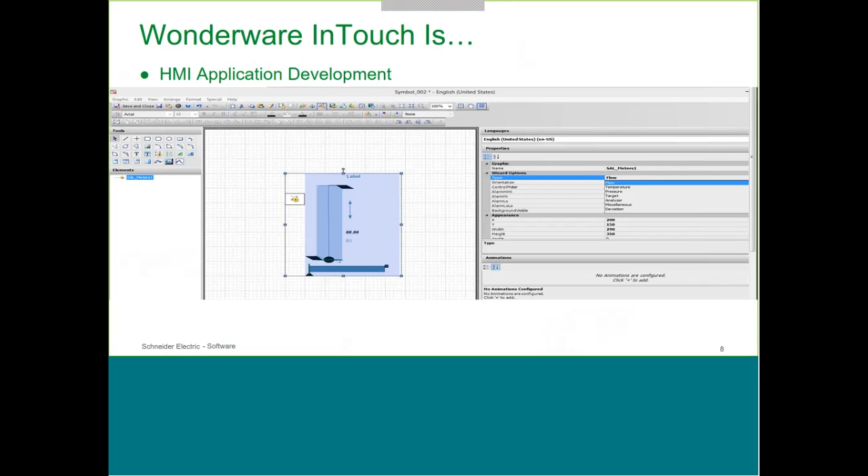So a little bit of background on what Wonderware InTouch is. It provides application development for HMIs. It provides real-time process and discrete data visualization and control. And it provides trends and alarms and history. And it's much more than an HMI.

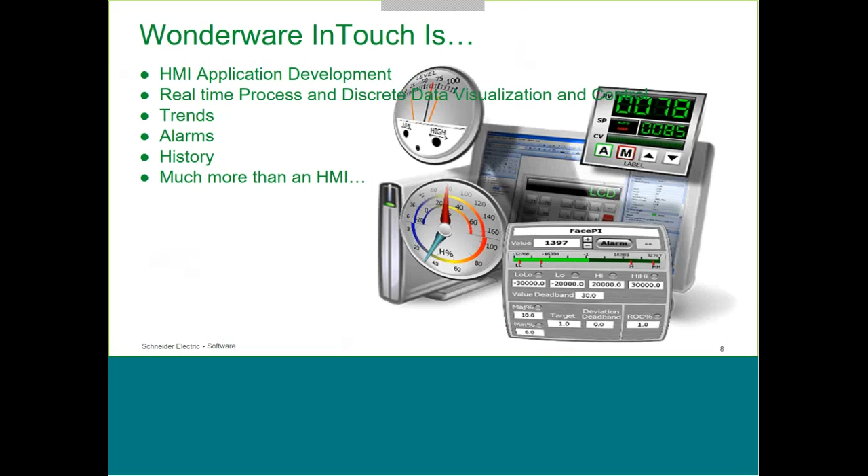You can access InTouch via any browser, which means any device. So using the native browser of your Apple device on Safari, or on your Android device using Chrome, or on your Windows device using Microsoft Edge or Internet Explorer or Firefox. So any of those browsers allow you to access your full InTouch application. And we'll show you how ArchestrA Graphics really help that capability to resize your InTouch windows and graphics based on the screen you're trying to show your application on.

So why use ArchestrA Graphics? Well, for one, there's 3 graphics libraries that are included to help you get started building your HMIs very quickly. That includes the ArchestrA Symbol Library, the Situational Awareness Graphics Library, and the Water and Wastewater Industry Graphics Library. Those are all included for free with current versions of InTouch.

Symbol Editor is now right inside of Window Maker. Symbol Editor is where you can create, edit, and manage ArchestrA Graphics, and it's the most advanced graphical editor for SCADA available. They are vector-based graphics, which means they scale really well across different resolutions and screen sizes. By using ArchestrA Graphics, your screens and your symbols will be InTouch Access Anywhere ready for any browser to run the application.

They allow you to create standards, enforce standards, and protect your standards. They provide reusability and change propagation capability. That's good for reusing engineering time, reducing development time, and they also include more animation capability, including alarm borders. We'll take a look at those.

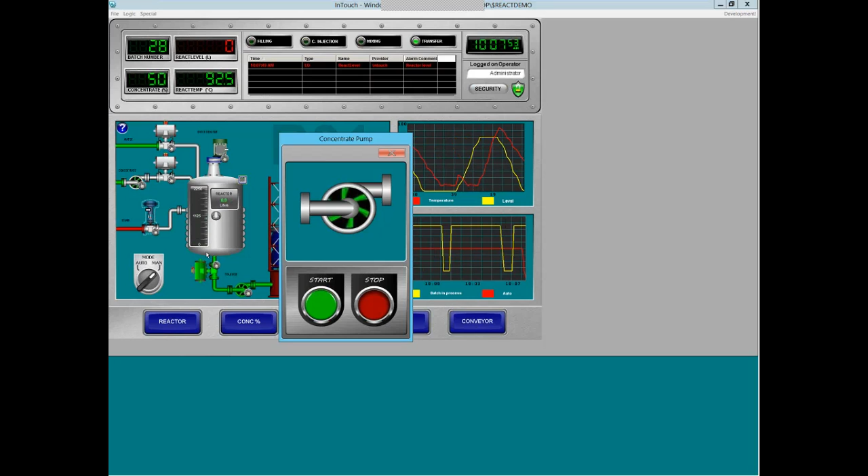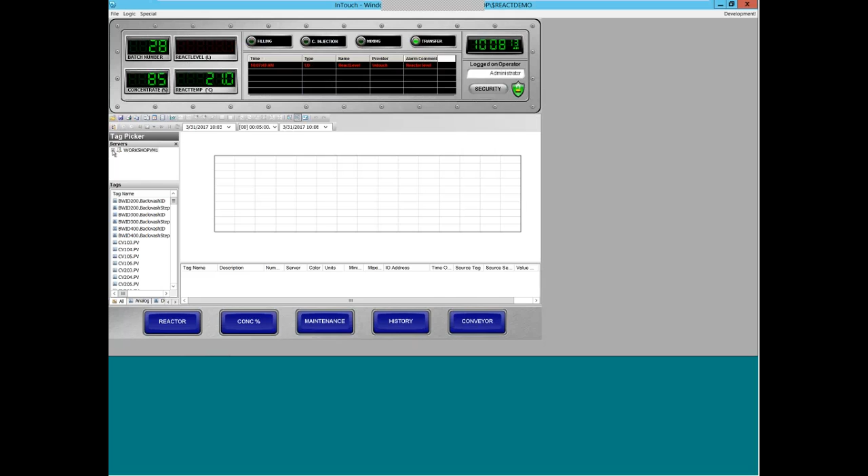You can see the high quality of these graphics here. And I can show you some pop-ups here, some other faceplates. I can change some set points and view some historical trending. This, of course, is using our Wonderware Historian Client Trend tool to do trending. There's native trending built into InTouch as well.

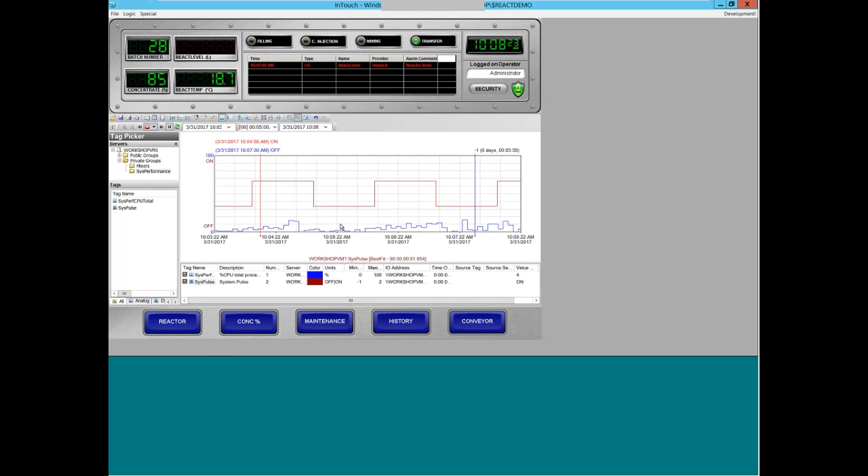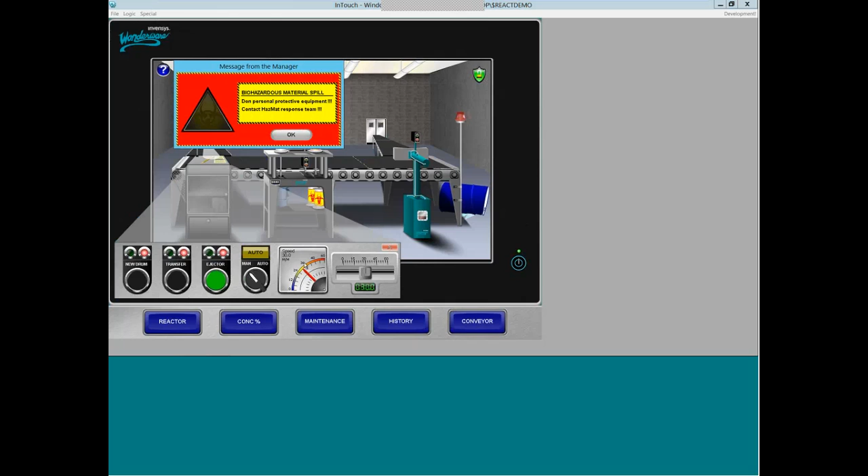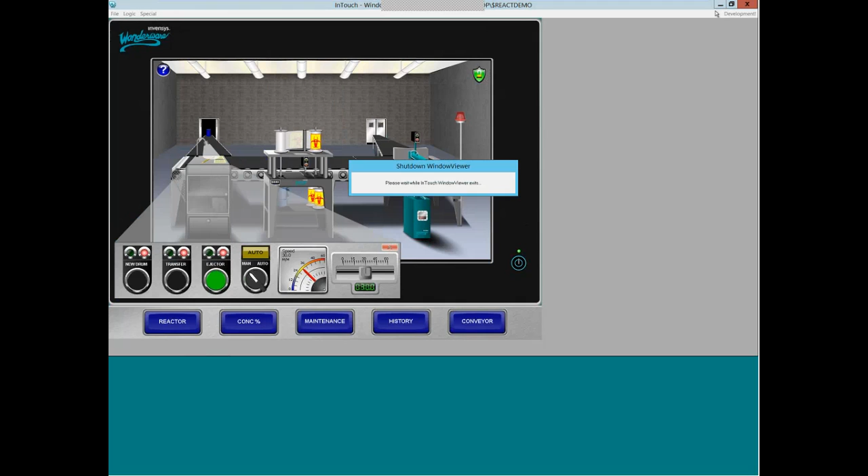And here's just another example of some really cool graphics inside of ArchestrA symbols. I'll put that in manual and kick the drum off the conveyor, and you can see the animation capability you can do here. Okay, so that's the Reactor demo. That's included as part of the Wonderware install. You can always open up that application to see how it was built.

I'm going to show you another application here, what's called the InTouch Modern application. This is also included in the current install of 2014 R2 Service Pack 1, where you can import this application from. So we'll click on File and go to the C drive, and it's in Program Files x86, in the Wonderware folder, in the InTouch folder, in the Demo app. And there it is, the InTouch Introductory Demo, AAPKG.

That AAPKG file is what you use when you import and export a modern application, which is what we're going to be working with using ArchestrA Graphics inside of Window Maker. You export this file called an AAPKG. Importing and exporting an application uses this new file. If you've never worked with a modern InTouch application or System Platform before, this is what the file is called when you export and import your application.

Right inside of that same folder is also a PDF called Using the InTouch Demo Application. So you can learn a little bit about importing and exporting that AAPKG file, with just a couple pages on how to get started using this. So let's take a look at the application here. We'll just go ahead and jump into Window Viewer.

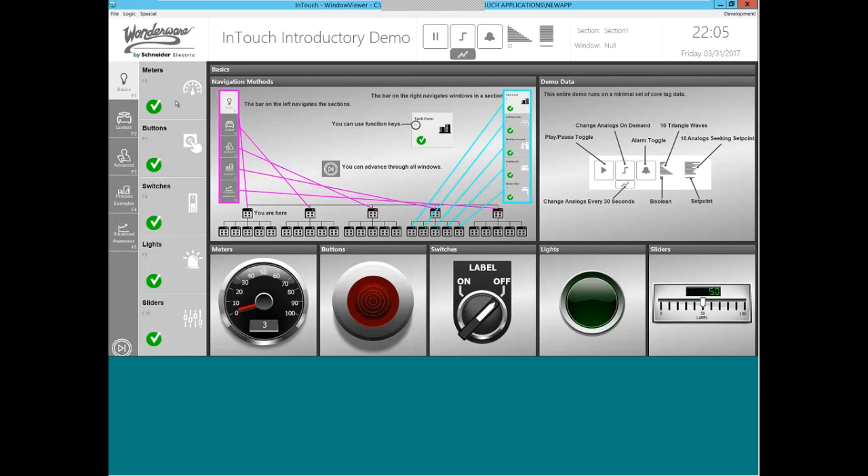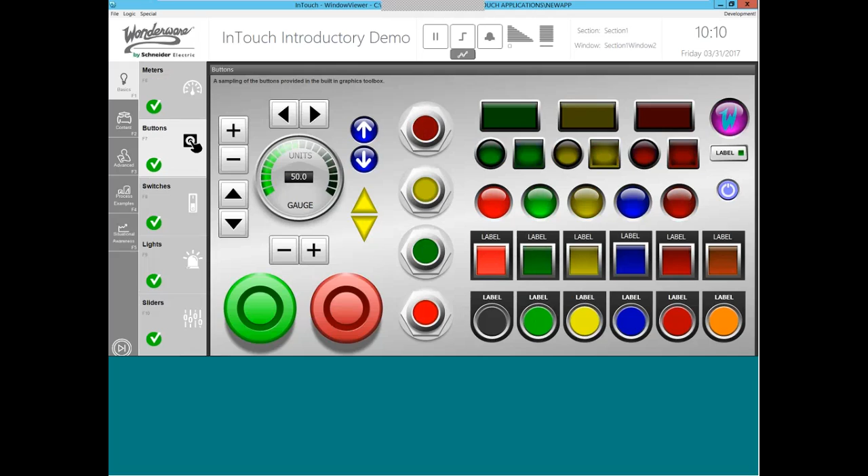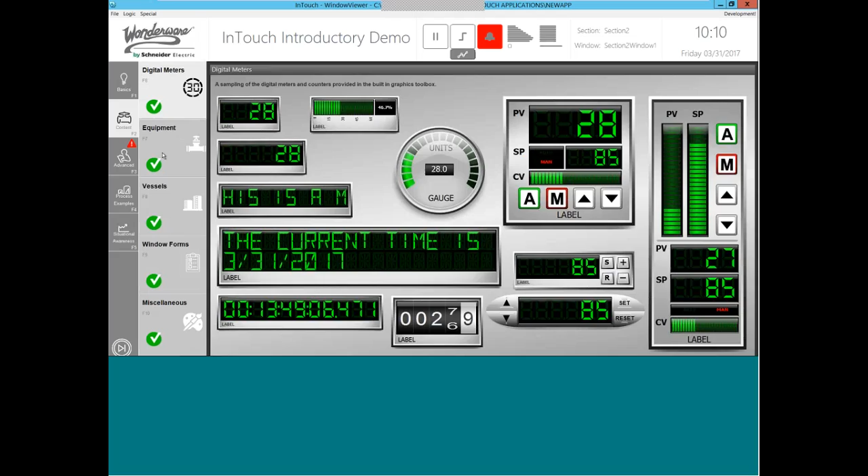Okay, so I've got a demo application here that again is included with the install. It just shows you some of the example graphics here. Those are some meters, some push buttons, switches. I'm just going to go through these quickly. Lights and sliders and meters. These are all included in the ArchestrA Graphics library.

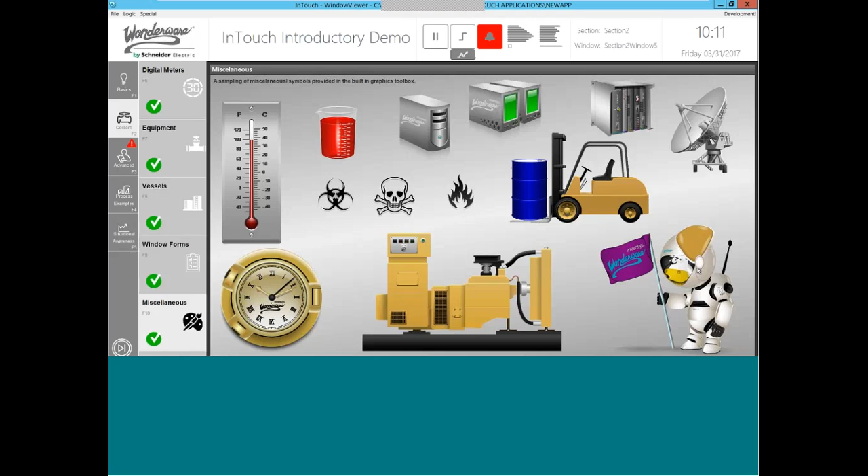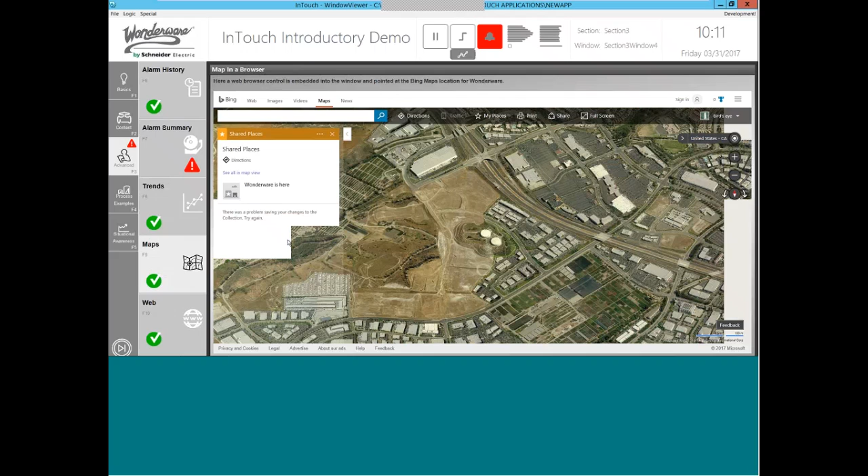Equipment, tanks, Window Forms, of course our Wonderware cow, our space cow, alarm history. Again, this is all part of InTouch. Alarm summary. I already showed trends. Mapping capabilities. This is just a browser embedded inside of InTouch. Here's another browser embedded inside of InTouch with our website.

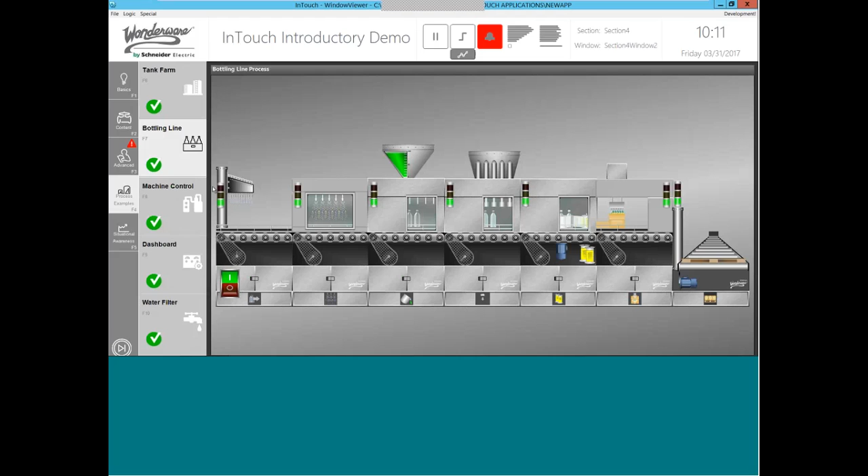This is a tank farm. Remember this one? We're going to edit this one here in development. Here's an example bottling line. And machine control, I'll go ahead and start up my car here and rev it up and see the details of temperature and PSI and look at some trends, some real-time trends here, look at some statistics.

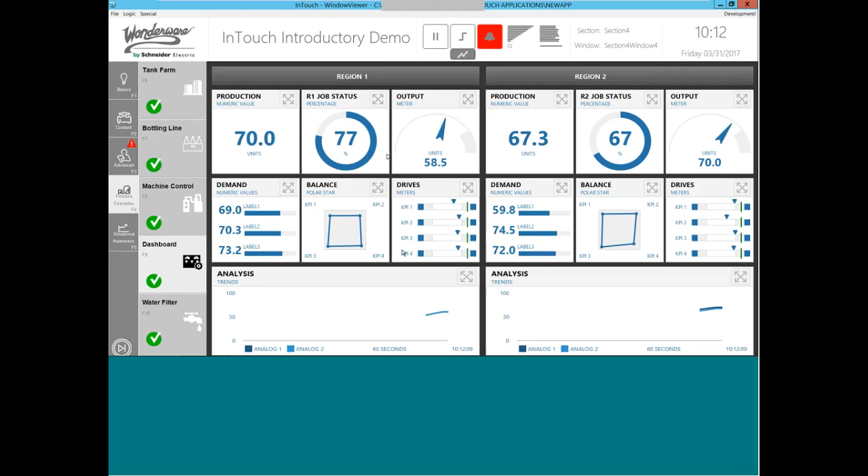And then I've got a dashboard here looking at a couple different regions. These are all, again, from our situational awareness library. Here's my more traditional HMI, looking at a gravity filter here.

Situational awareness. So if folks are new to situational awareness, in the past we used to build single value, real-time value displays, and what situational awareness graphics help you do is build more context in for the operator so they can actually see not only what the real-time value is, but how does that compare to maybe my target region or my set point and my upper and lower control limits or alarm limits, and even adding now a trend pen to see what's been happening over time.

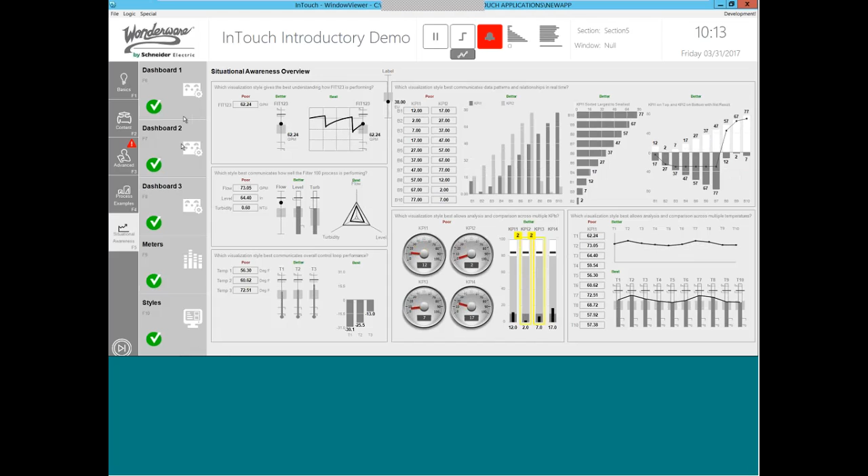And again, I'll show this in the development environment, how these bullet charts are configured to show an alarm border. So you can kind of see there's different regions here and then a set point. And so I'll show you how you get this alarm border here to show up.

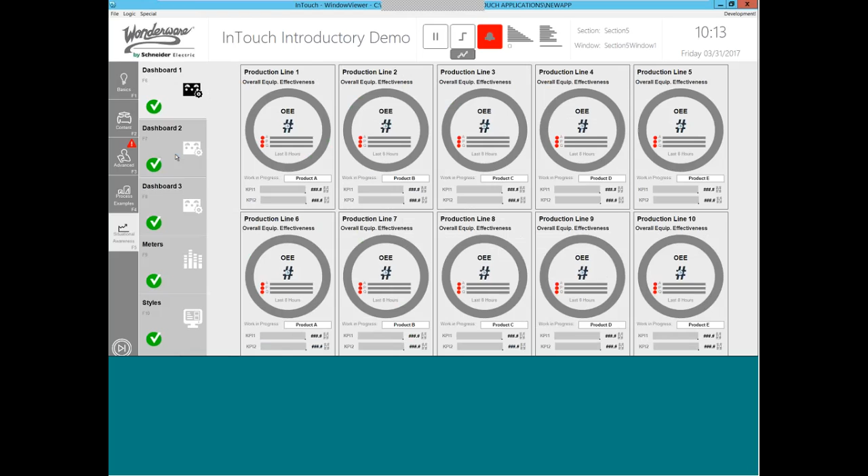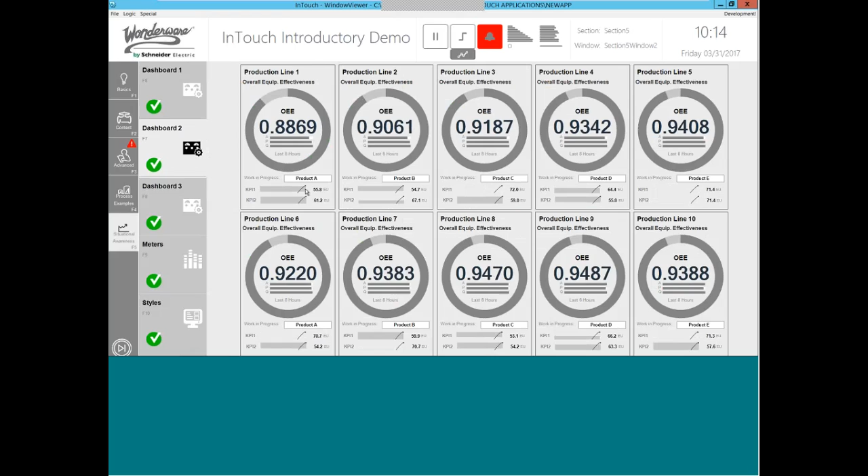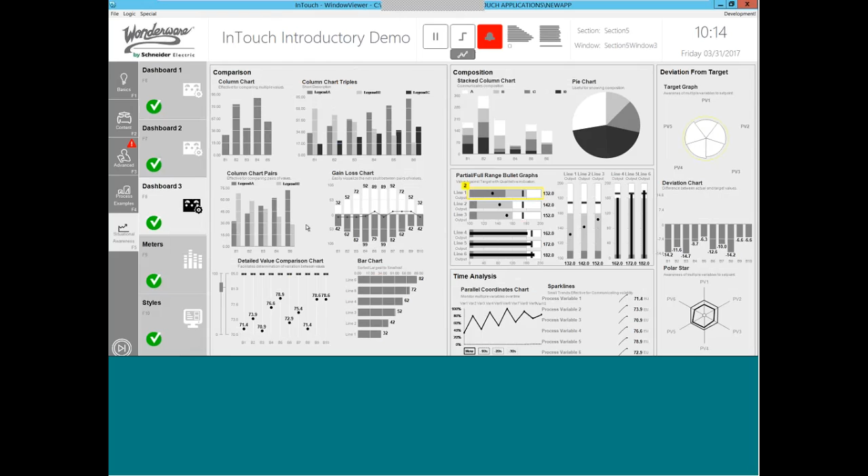Just another example, OEE dashboard. We're looking at a calculation on 10 different production lines here, looking at our overall equipment effectiveness, and we also, again, have these spark lines here, these real-time trends that are very lightweight. And some more dashboard graphics. These are all built in, again. Folks want to do more dashboards these days for supervisory overview of the status of their plants and the quality of their process.

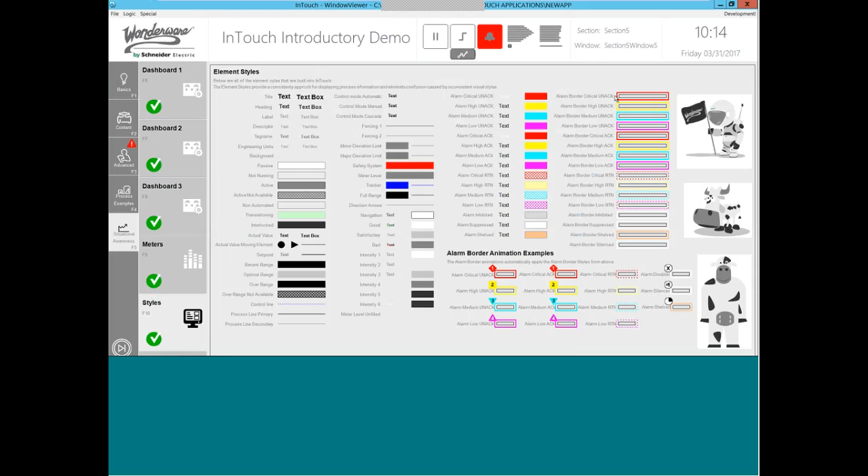Some meters, and I can go ahead and toggle the names of my meters here and the values. So I can toggle those on and off. And finally, styles. So again, we said you can create standards with ArchestrA Graphics and symbols. So create standardized colors. So what does an alarm look like when it's unacknowledged and it's a critical alarm versus what does a high alarm look like when it's been acknowledged? So you can create these standard colors and then enforce them throughout all the graphics and symbols in your application.

So how do I build a modern application? Well, back inside of InTouch Application Manager, which everybody who has used InTouch before is familiar with, I would create a new application if I was starting from scratch here, create new. And by default now, you get the application type to pick, and modern application is what gives you ArchestrA Graphics inside of Window Maker. If you say, hey, I don't want the option to see those ArchestrA Graphics inside of InTouch, you can always choose to create a legacy InTouch application. But of course, that's not what we're recommending here.

We're recommending modern applications. And if I've got an old existing classic application, maybe say it's version 9.5, how do I upgrade it to a modern application? Well, the same way I've always upgraded my applications. I simply open up my application in Window Maker in the newer version. So I've got 2014 R2 Service Pack 1 installed here, and I simply open it up in Window Maker. It'll ask me to migrate my application, and I would say yes. I've already done that, and I've changed the name now to this upgraded classic InTouch app.

You can see now it's a modern application, and I'm going to go into that one here in a little bit and show you how to convert existing InTouch windows, classic InTouch windows, into ArchestrA symbols. So for now, let's go ahead and open up that modern demo app in Development WindowMaker to show you what we've got here inside of the ArchestrA Graphic Toolbox.

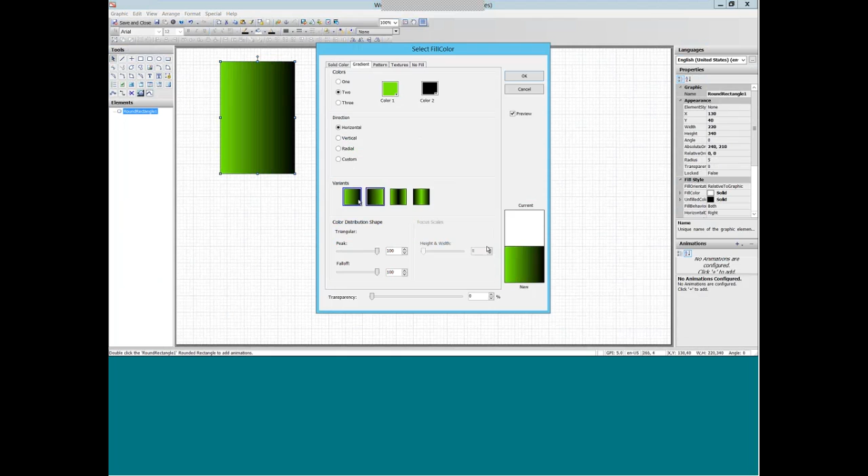And so what I can do if I want is I can use all these tools here to create my own graphics. I can create shapes here, and I could come here to my fill, and I can start creating my own custom graphic here with multiple gradients and variants, and I can see the preview of what those look like, and have transparency, and I can even flip it around if I want to. Okay, I see over here on the right-hand side, I can specify the XY location, the width, the height. I can add what are called custom properties, and we're going to do that here momentarily.

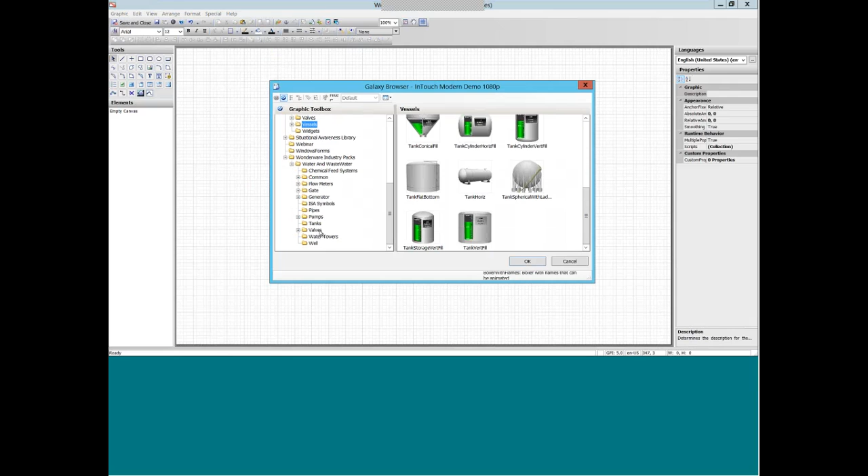So what we want to do first is just go browse our graphic libraries. Instead of building one from scratch, let's go grab our pump centrifugal, just to kind of show you some of the other ones here, right? Here's my tanks, and here's my water industry pack here with, again, those flow meters. Okay, so lots of good stuff here. Flow meter face plates. So I'm going to go ahead and go back to my pumps here, and I'm going to use this pump centrifugal.

Okay, so what I'm doing right now is I'm embedding a graphic that already exists, and that graphic is the same one that's here in my ArchestrA symbol library in my pumps folder called Pump Centrifugal. So what I'm going to do now, after I've embedded that, is I'm going to create a push button to turn that pump on and off. So I'll create a button over here.

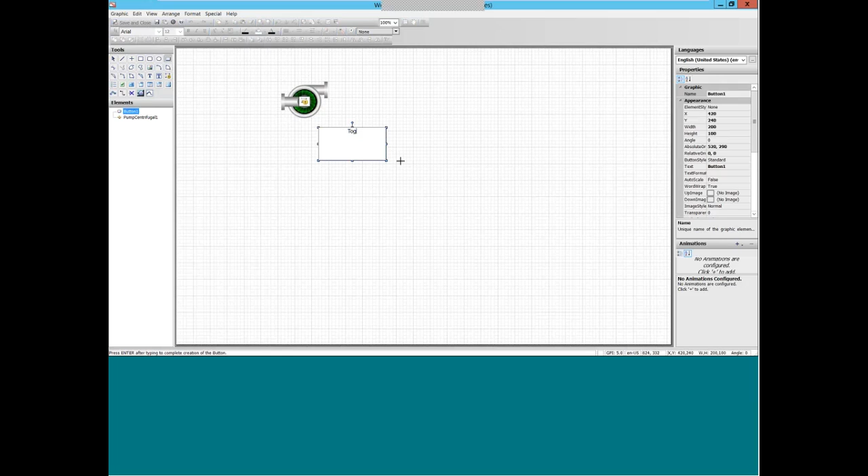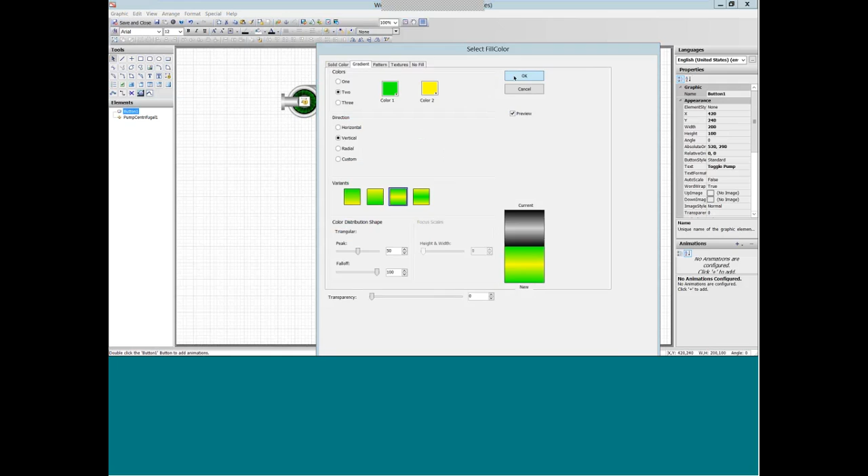I've got my button icon, and I'm going to just say this is the toggle pump, and I'm going to go ahead and again use one of those cool gradients up here from my fill color here, and I'll just maybe make it a little bit more colorful there. And so do that. Get a preview, see what that looks like, and maybe the second color, I'll make it more of a yellow. Okay, so I can quickly start to build some really professional looking graphics here and not have to spend a lot of time doing this.

All right, so now I want to go ahead and create a custom property here to toggle this pump with my push button. So I'm going to create a custom property, right-clicking on the canvas, click Add, and I'm going to call this custom property toggle pump. So I'll spell it right, toggle pump. Okay.

And so that's my custom property. And so what I'll do now is inside of this push button, I'm going to add an animation. So remember, here's all these cool animations that you didn't have with InTouch graphics before. So fill styles and visibilities and alarm borders and the location, the orientation, value display, user inputs, push buttons, action scripts, show symbol, hide symbol.

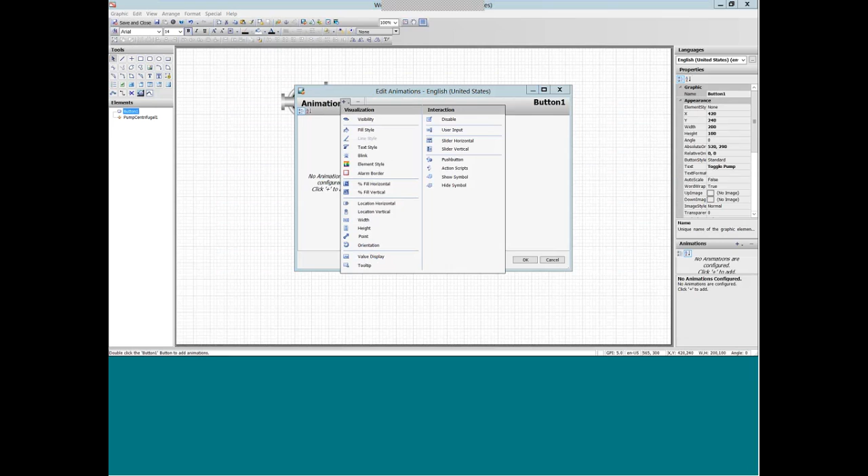So we're going to make this a push button. And it's a Boolean, and we're going to use our toggle pump. And look at that, IntelliSense finds our custom property there, toggle pump. And we're going to make it a toggle so we can actually get a preview of what that does. Sets our value, true and false.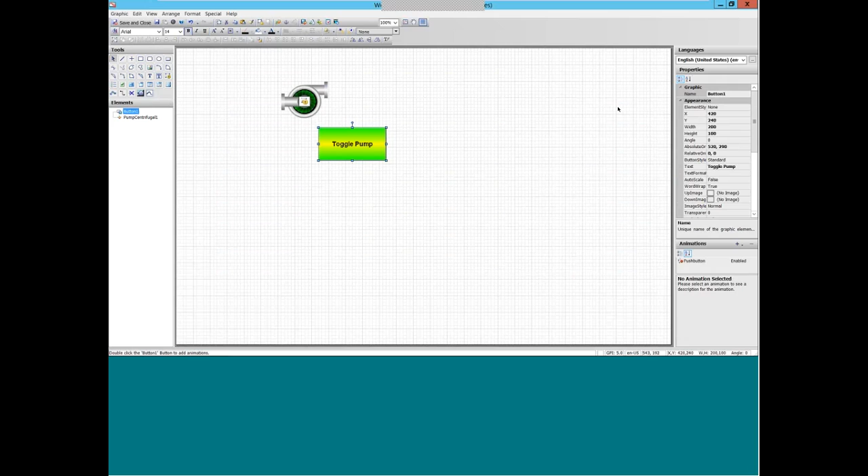Okay, so now we want to give our graphic a name here. So let's give our graphic a description here, and we're going to call this, again, our pump, call it W_pump. All right, so let's just give it a name. Okay. We'll go ahead and save and close this. Actually, you know what? We won't even close it. We'll just click Save.

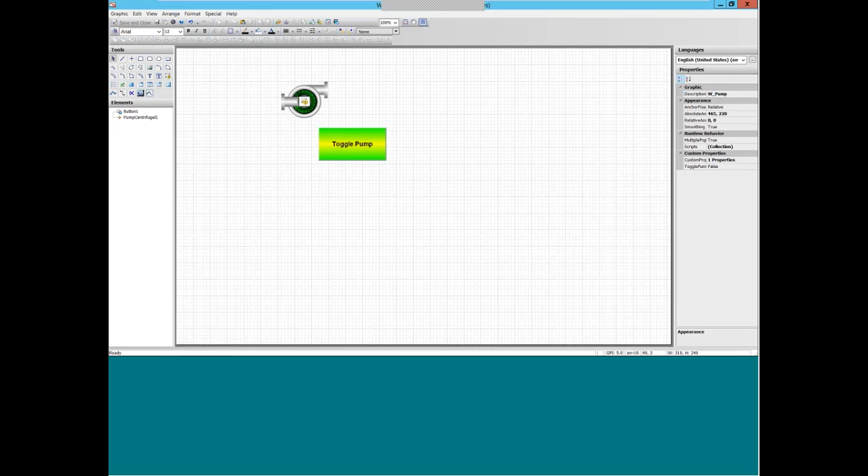And now we'll go back into WindowMaker, and we'll create a new window and call it New. And make it bigger. And now we've got our webinar pump here. I'll just simply drag it over here and double click on it. And there's my toggle pump custom property that I created.

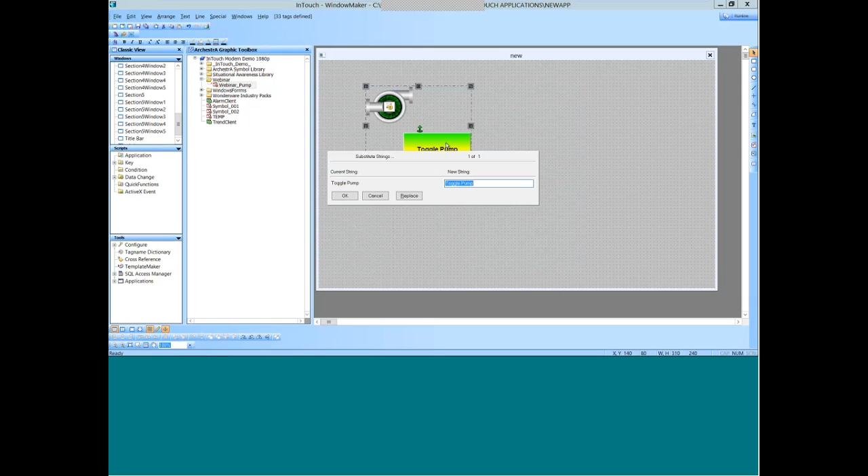And I'm going to go ahead and tie that to my InTouch tag now. So I'm going to go ahead and tie that to my pump 1. And the same thing with the animation for the pump. There's built-in animations, built-in custom properties for those ArchestrA graphics. We'll also use pump 1 for the 2 animations on that pump. There's an inlet animation and there's a pump animation. Okay, and then maybe I'll do Control L to substitute strings, and we'll say toggle pump 1.

All right, so let's just take a look at that real quick. Okay, so now I can turn my pump on and off. That looks good. Great. Okay, so what if I want to add a second one now? There we go. Add a second one. Open it up. I'm going to tie this one to my pump 2 tag. Double click. Go add it to pump 2.

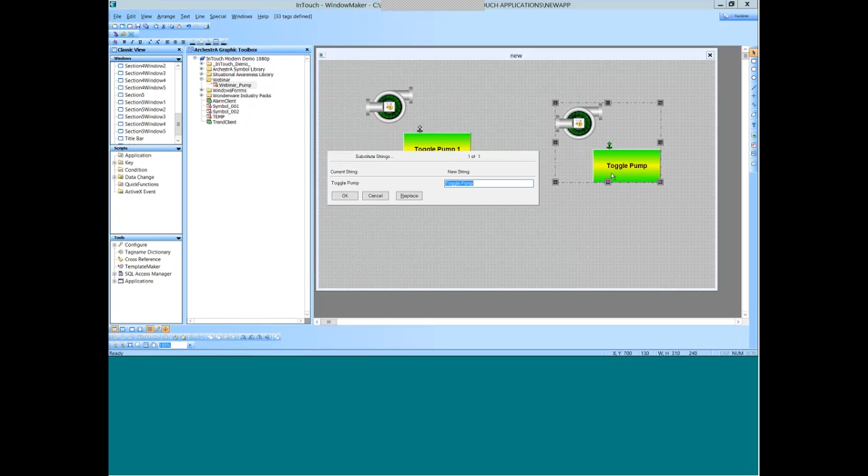And same thing here with my other animation for my pump. Just double click in this field, pump 2. And then for toggle pump, I'll also tie that to pump 2. Okay, and then we'll do a Control L to substitute strings, and we're going to say toggle pump 2. Click OK. All right, so you can see how fast we can start doing some really nice graphics here and creating that standard, right? We've got a standard.

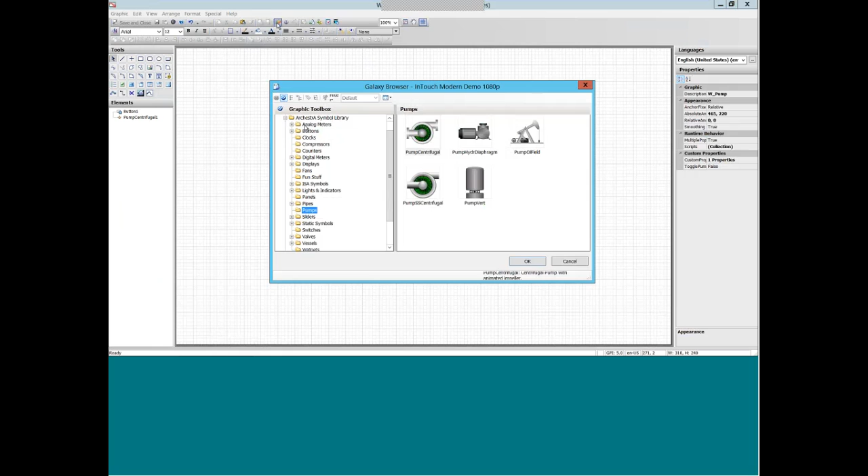So what happens now? I've got my pump here. Now, what if I want to go add a tank to that? Go here to my vessels, and we'll say we're going to add this tank cylinder vert fill just for simplicity's sake here. We're just going to do this quick. And again, I'll do a save and close this time.

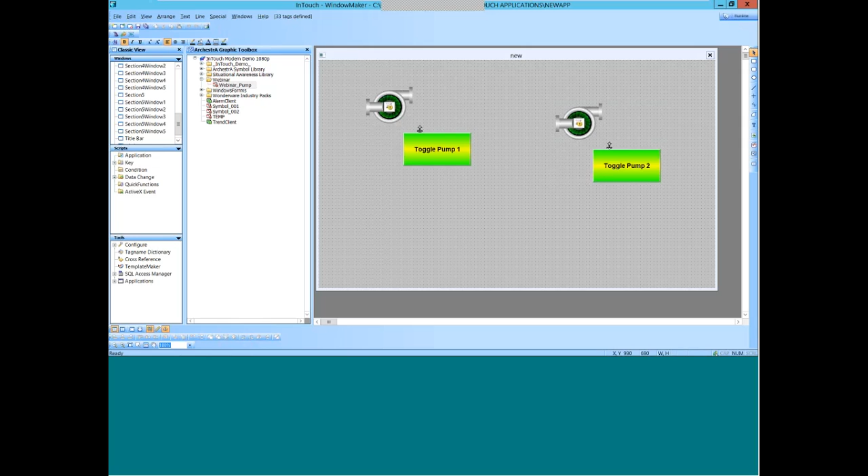And then there's a little button on the bottom here. It says one or more embedded symbols have new content. Double click to get the latest content. So that refreshes the screen. And now I've got the ability to go assign my tags to my tank. So I could go change the value here to my analog tag for my tank. Okay. So that's getting started there with ArchestrA symbols.

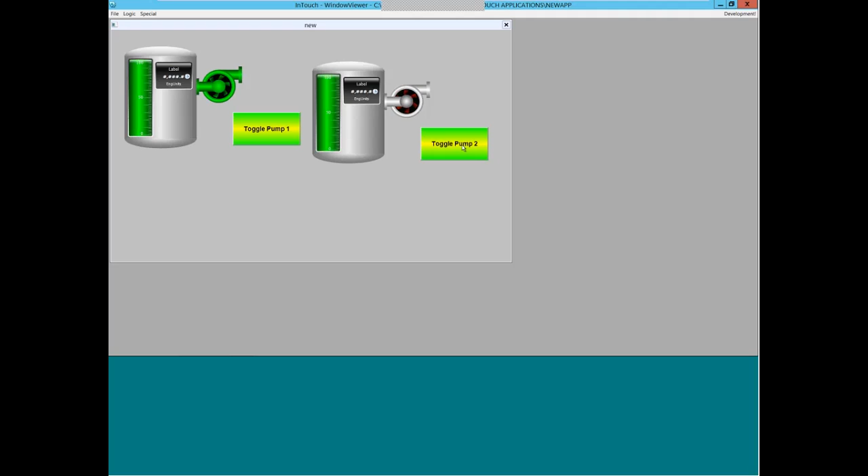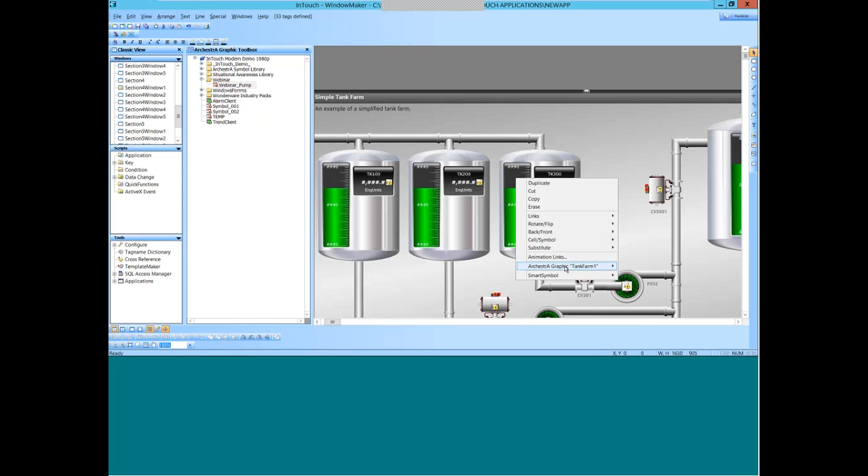Now let's go ahead and take a look at one of our existing screens we had here. We're going to go into Section 4, Window 1. Remember this screen here we showed you in the InTouch Modern app? So this whole screen is a single ArchestrA symbol. So when I right-click on it, I can go to ArchestrA Graphic Tank Farm, Edit Symbol. And here it is. So this is what we recommend, making your whole InTouch window an ArchestrA symbol. And I'll show you some benefits of how that helps.

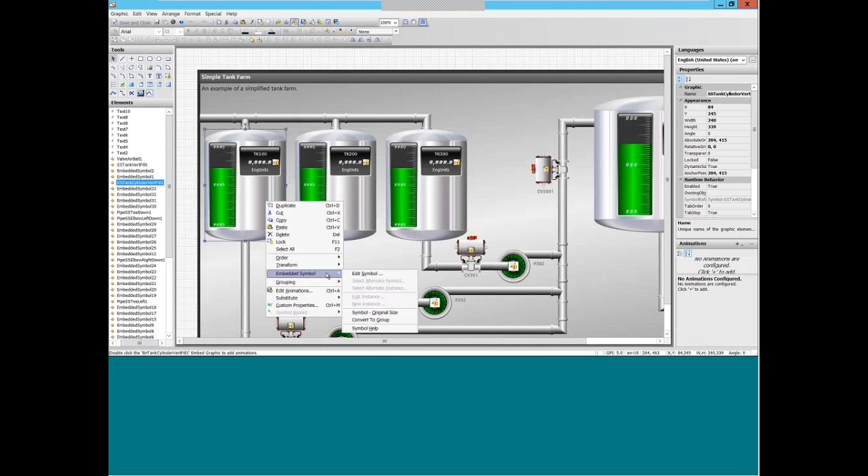So if I look at these individual tanks and I click on Embedded Symbol, they were all built from this parent graphic here called SS Tank Vert Fill. So if I look at the custom properties of this SS Tank Vert Fill, I can see that my fill color is green. And so if you remember that animation when those tanks were filling, they were turning green. And so maybe I want to change that. I want to say, hey, instead of green, I want to make that fill color red. So I'll save and close that.

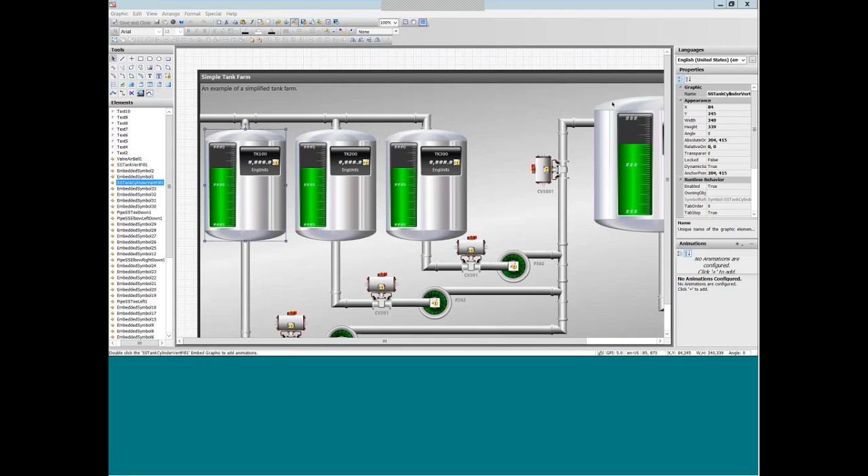And then I'll jump back into Window Viewer. Let's come back in here to switch to Runtime, the Window Viewer. And now I've got a red fill color. Okay, so remember I changed that in one place. I changed that in the parent graphic, and now all the children graphics, the instances, they all got that change. Okay, so again, that's the reusability and that change propagation of ArchestrA Graphics.

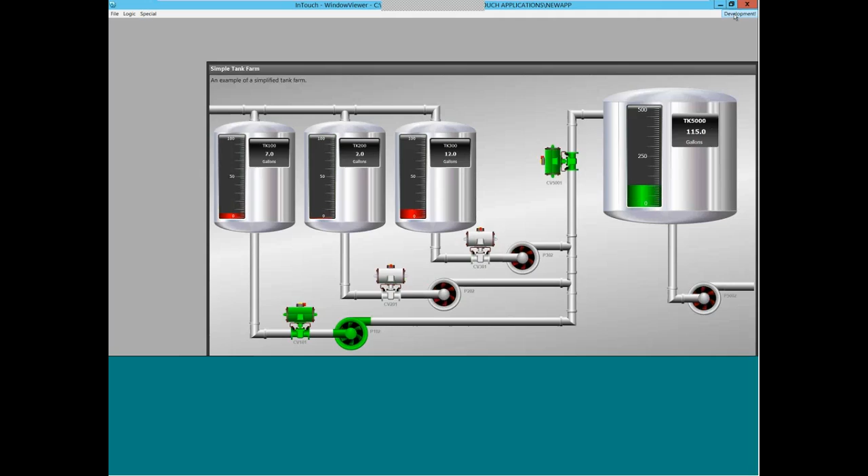All right, so let's take a look at how to go ahead and convert classic InTouch windows over to ArchestrA symbols. So I'm going to open up InTouch Application Manager again. And here is my upgraded InTouch Classic application. All right, so let's open that up in Window Maker. Okay, so I'm going to open up my window called Screen System Overview, and that's this guy here.

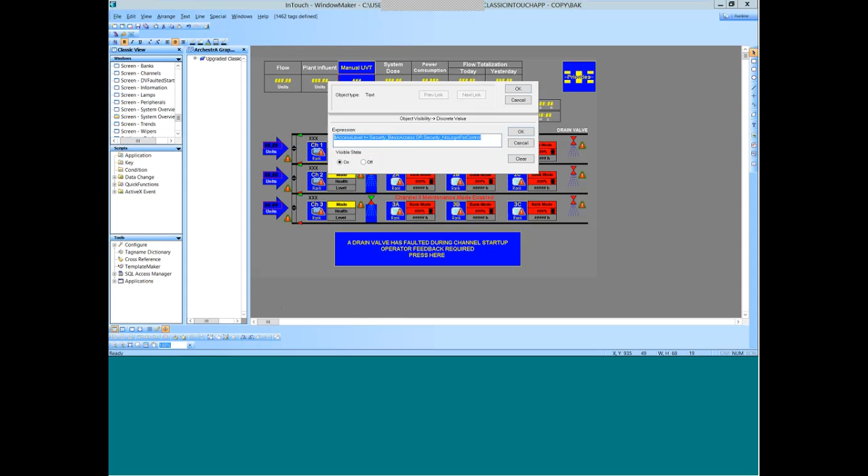So notice this is my traditional InTouch screen, my classic InTouch screen that's got the InTouch animations and expressions here right inside of Window Maker. So if I double click on this, I can see the visibility. You know, that's just in my classic InTouch app. Okay, I got a show window here, so it's going to show a specific window. Okay, so this is classic InTouch.

Well, what I can do now, instead of managing these all, is, you know, my traditional InTouch where I can't actually save these graphics in a graphic toolbox or anything, and doesn't scale very well. I really get some bad stretching when I try to scale it going from 4:3 to 16:9, for example. What I can do is I can right-click on it, and I can convert to ArchestrA symbol.

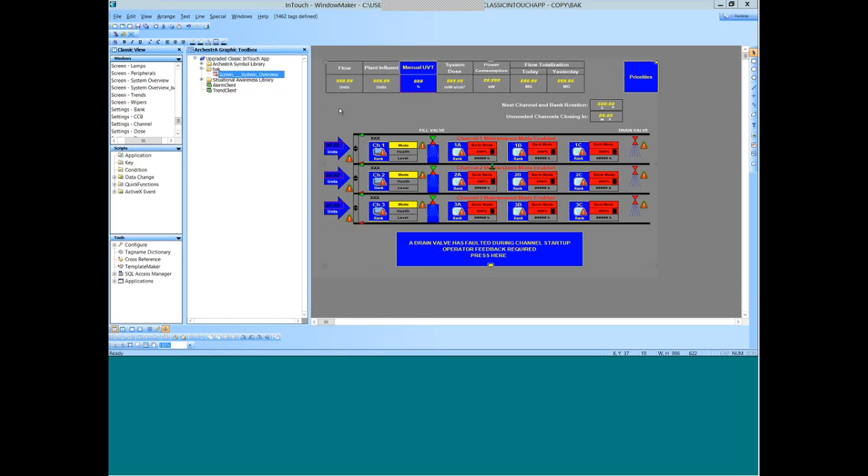And so when I do that, I get a new screen here that actually now is an ArchestrA symbol, and I get a new graphic toolbox, and there's that screen as an ArchestrA symbol. So literally, I could delete that whole graphic, and I could then put it back on there, because now it's saved as an ArchestrA symbol. And so what if I now want to go edit it or take a look at it inside of Symbol Editor? There it is. And so now all of the InTouch referencing is intact.

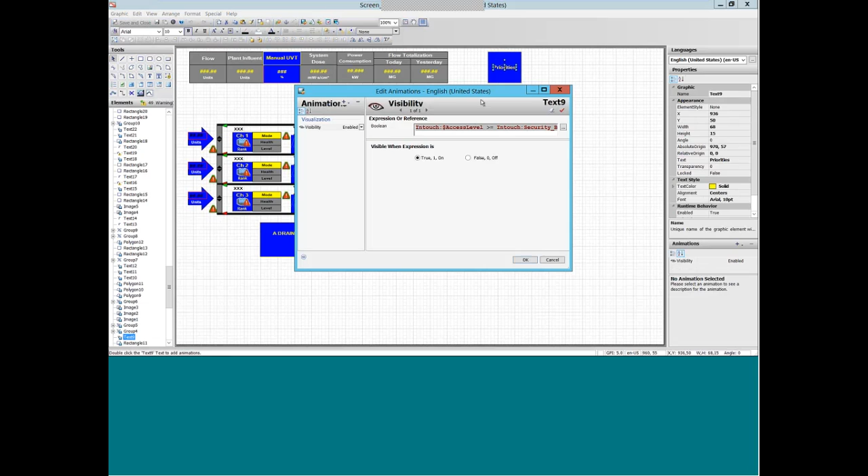Okay, so this is all now available inside of Symbol Editor. So this is cool now because now I can save these windows as graphics, and I can do all of the new animations, and old graphics can run side by side with new graphics. I get the power of the scripting environment. But what else is cool is I'll create a new window.

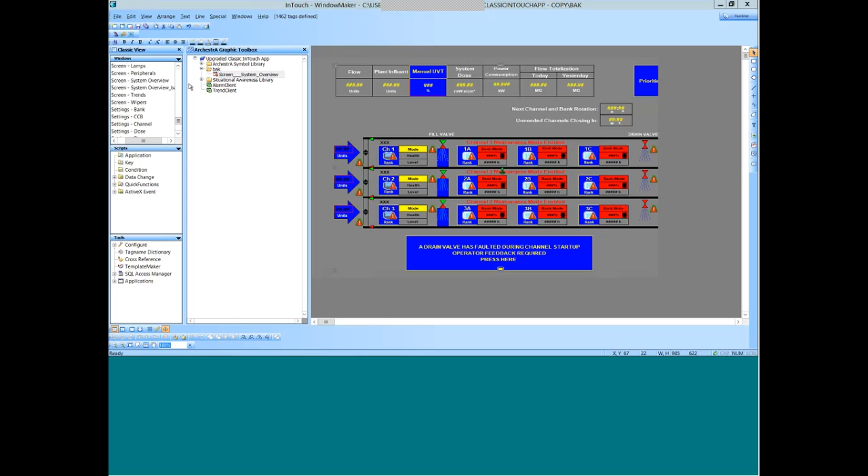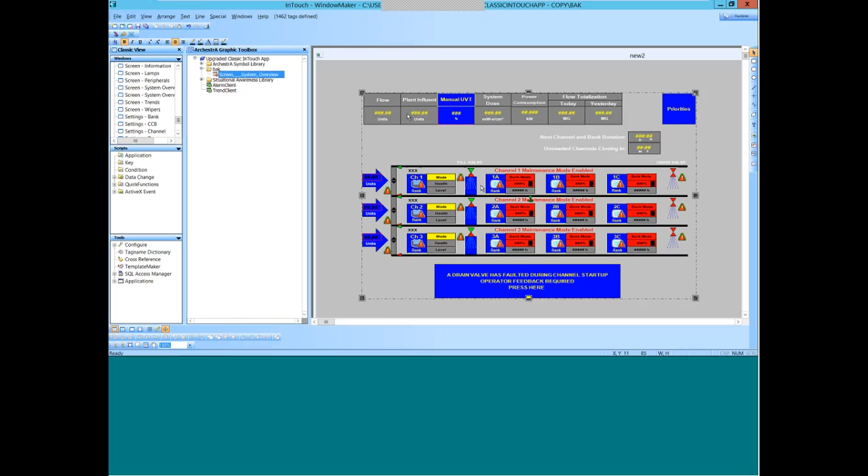Okay, and so I'm going to take my new upgraded InTouch window that's an ArchestrA symbol, and look how I can resize this. I don't have to go resize each individual graphic like I would have had to do in classic InTouch. So now I can run this application on my high-def TV, and because it's an ArchestrA vector-based graphic, it does a really good job of scaling. There we go.

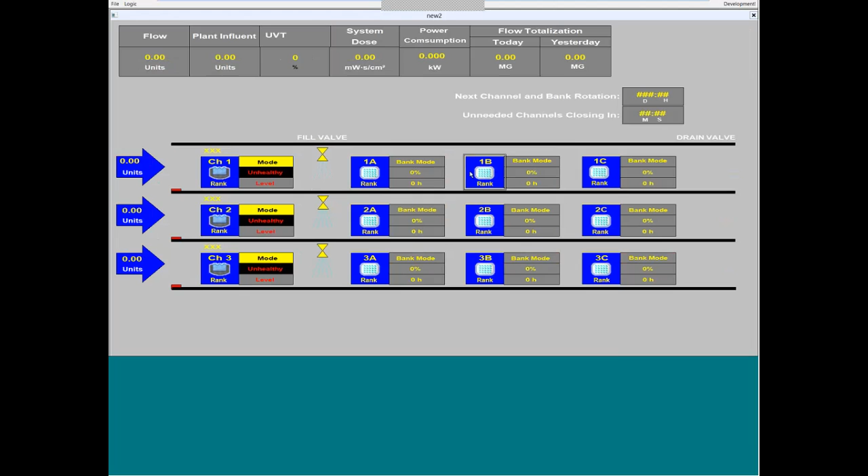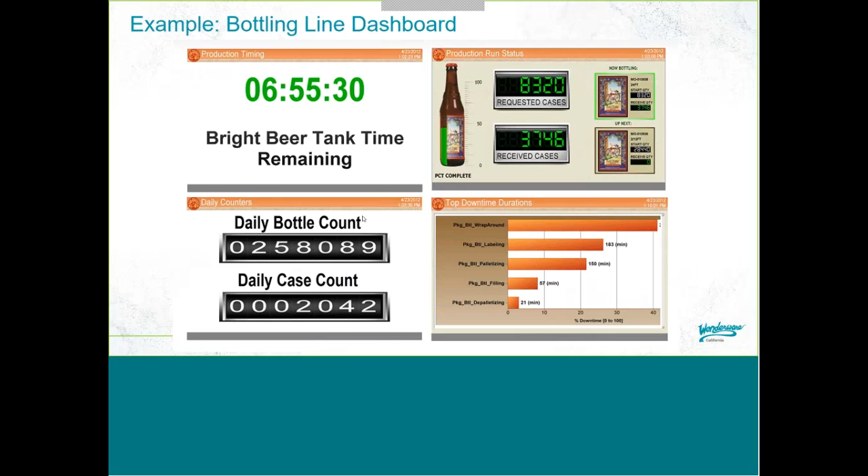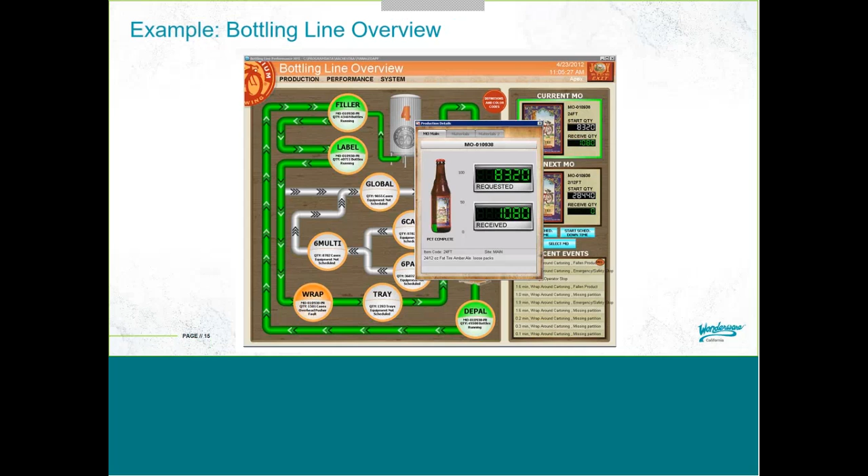All right, so here's some examples of what customers have done. There's a little beer dashboard. If you've heard of New Belgium Brewing Company, this is shared by them. This is the actual screen they use to monitor their bottling line and their dashboards. Here's an example batch system, looking at the batch status.

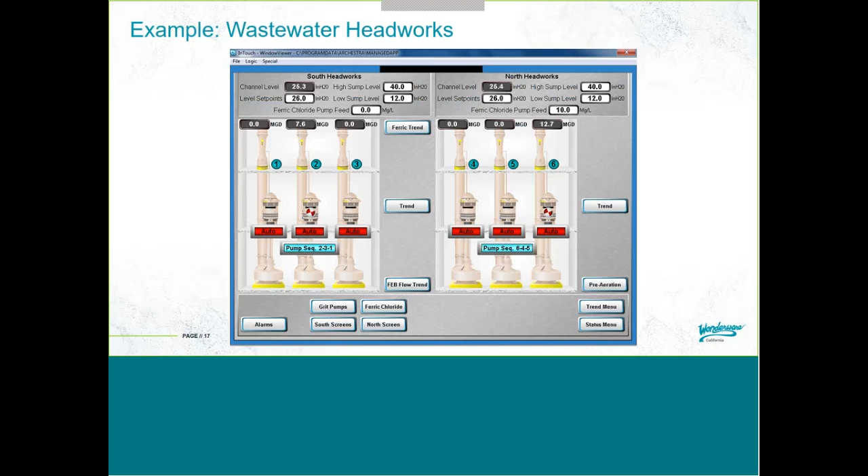And what's really helpful for them is that this allows the operator to actually see what the physical process and the equipment looks like, even though it may not be visible because it might be underground or underwater. So they may have never seen this equipment, but they're still responsible for operating it and maintaining it. And so now they get a visual of actually what's happening in the process, and it looks just like the real equipment in the field.

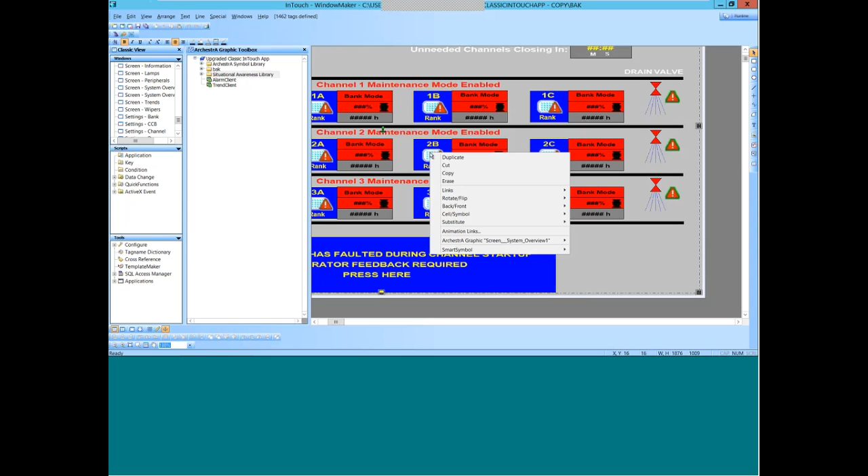So that's probably the best way is in the development environment. If you're not sure if you're using ArchestrA Graphics, you can right-click right inside WindowMaker on any graphic and see if it is an ArchestrA Graphic or not. The second half of that question was what was it, Kelly? How do I convert InTouch V10 to ArchestrA? Okay, yeah. So I think we covered that where we converted the screen, for example, to an ArchestrA symbol. So, you know, that's upgrading your application to a modern application, and then you have that capability.

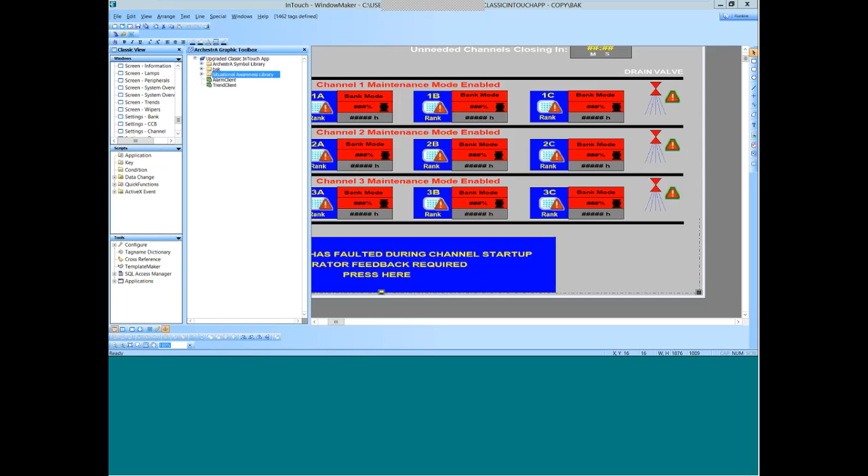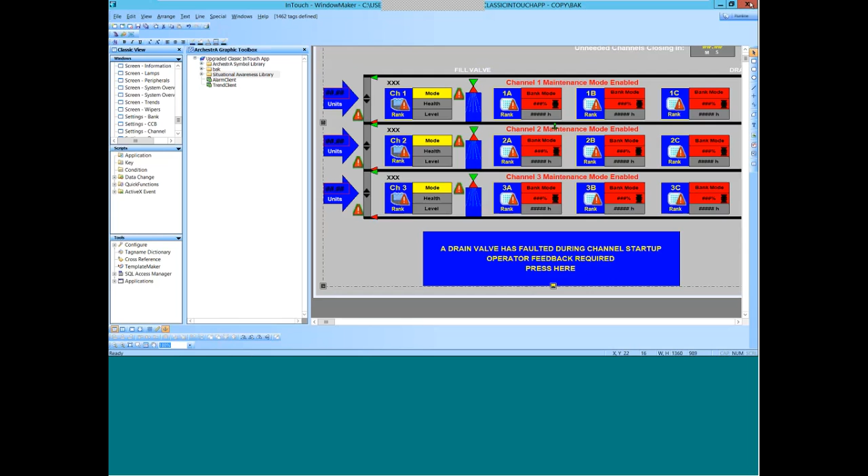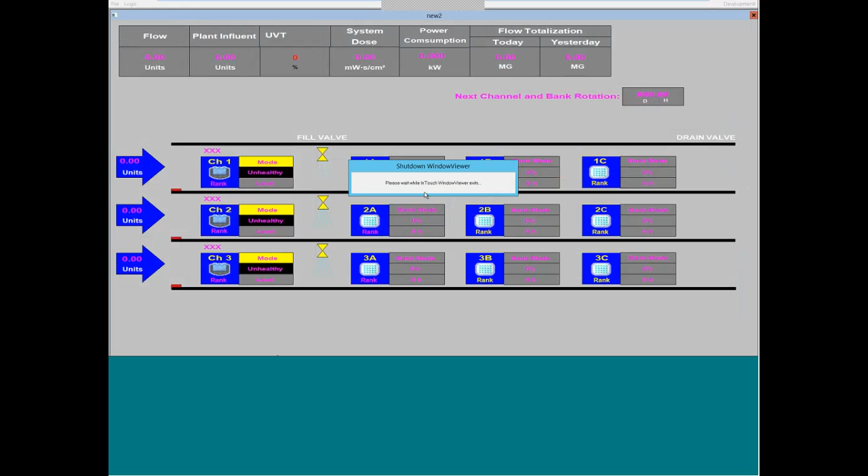Okay. Do I need to specify the monitor screen definition that I need to view InTouch graphics every time? Isn't this process automatic? Well, so again, you can create a standard graphic, and it does a pretty good job here of scaling. So again, if I were to come back here to, well, I don't want to spend too much time on that, but I could have WindowViewer. I'll show you. Exit. You can have InTouch WindowViewer automatically adjust to the target screen resolution you want.

So here in my upgraded InTouch app, I can come here to Node Properties, and I can come to Resolution, and I can say, allow WindowViewer to dynamically change resolution. So this allows me to automatically convert the windows in my application to the screen resolution. So if I'm viewing this on high-def TV, it'll display it full screen in high def. If it's an old school 4:3 monitor, 1024 by 768, it'll shrink the windows down to 1024 by 768. So no, you typically build your application for the most commonly used target device.

If it's most commonly going to be used on an HD TV, you typically build your screens for that, but then you use WindowViewer automatically converting the screen resolution to display on whatever size monitor you end up using for different target devices and monitors.

Okay. Can I add new graphics while the application is running online? Yeah, so again, without getting too much into the weeds here, you can set an application to notify an operator that a change has been made, so that it will prompt them, hey, do you want to upload the changes? Or you can set the application to restart automatically, or you can manually, of course, upload those changes. So yeah, there's capabilities to pick how you want to notify an operator that a change has been made, and do you want to automatically upload those, or prompt the operator, or just wait to do it later.